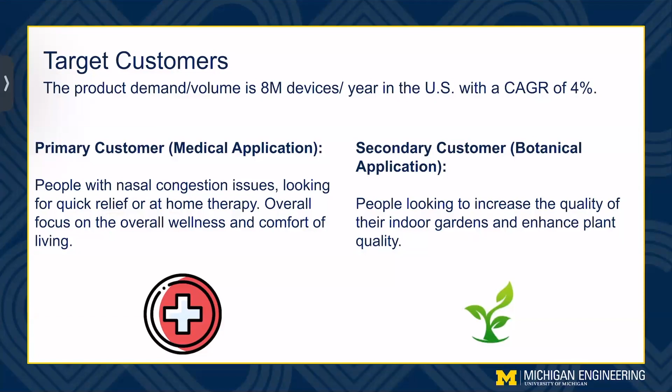We have identified two major target applications for our product. The primary application being medical, with an overall focus on wellness and comfort of living. And the second being botanical applications, such as people looking to increase the quality of indoor gardens. Both applications require an efficient humidifier that will best improve the quality of the air.

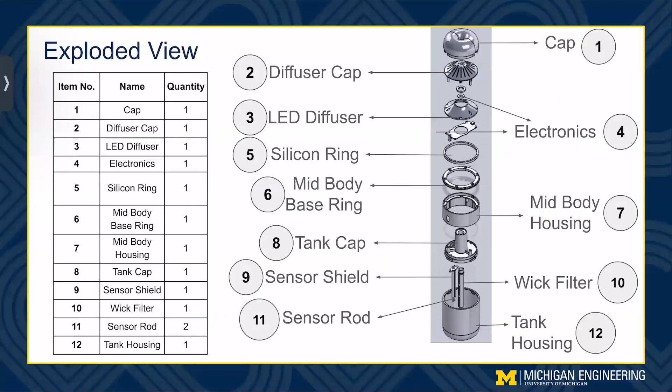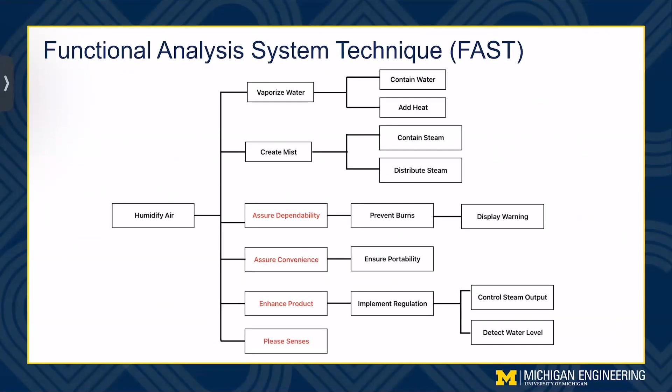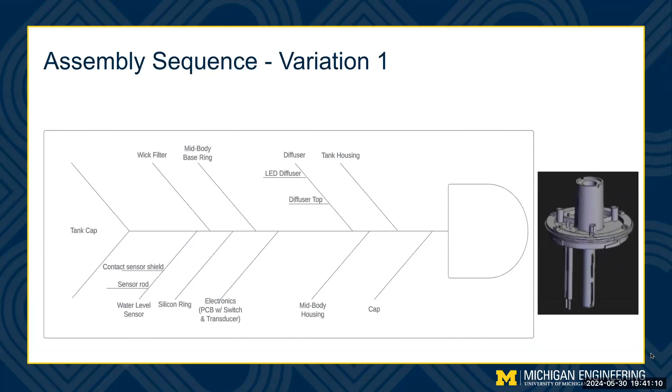We then add the electronic components, followed by the two diffuser components, which include the LED diffuser and the diffuser top. This is then followed by the three housing components, which is the mid-body housing, the tank housing, and finally the cap.

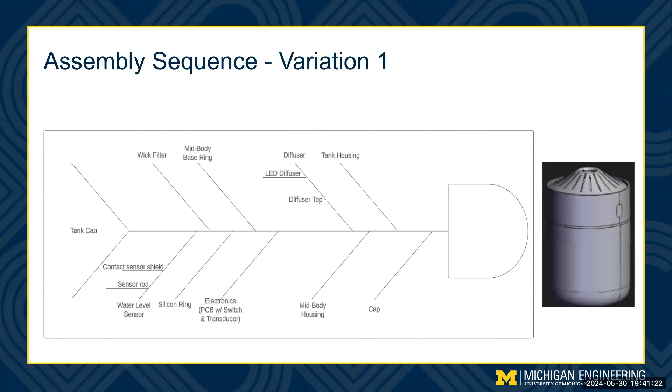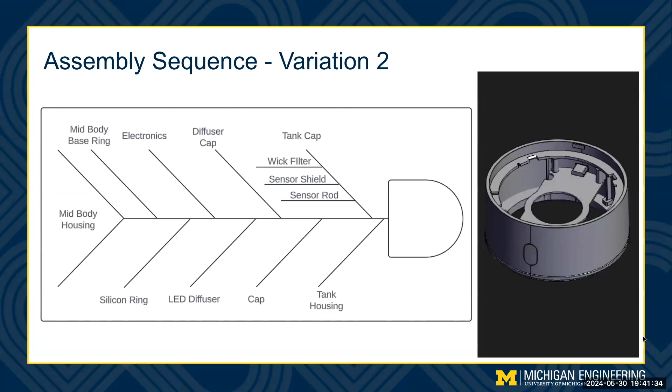For the second variation, we start with the mid-body housing, which is then followed by the mid-body base ring and the silicone ring. We then add the electronic components, followed by the LED diffuser and the diffuser cap. This is then followed by the top cap, to which we add a subassembly of the tank cap, followed by the water level sensor components, which include the wick filter, sensor shield, and the sensor rod. And finally, we complete this with the tank housing.

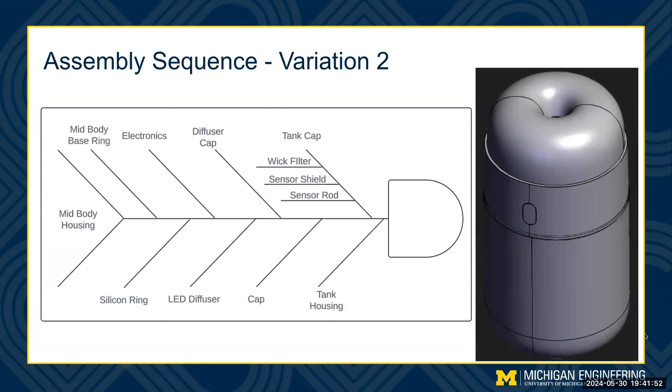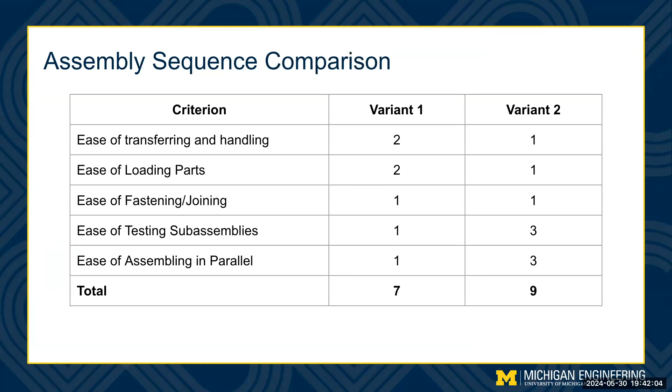When comparing these two assembly sequences, we see that variant 2 seems to be the more likely sequence to go with due to the ease of testing subassemblies and the ease of assembling in parallel due to the addition of the tank cap assembly with the water level sensor components.

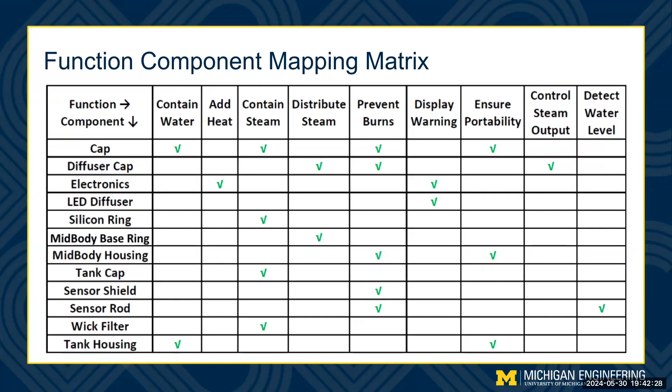We then created a function component mapping matrix, which matches the components of the product along with the functions from the FAST diagram. In this, we see that prevent burns seems to be the most common, as it contains close to 5 components from the product. This could be a potential for inefficiency and could see a possible redesign.

This is our bill of materials along with the cost estimation. We use custompartnet.com to estimate the cost of material, processing, and tooling. We assume that the assembly was done manually and used an hourly rate of $20 per hour for an assembly line worker. Most of the manufacturing process is injection molding, but we can also see processes such as CNC machining and die casting. We also did purchase some of the components. The total cost ended up being $45.53.

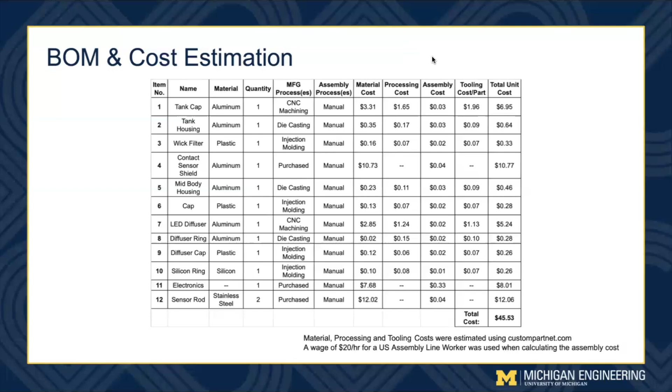We classified the components of our product by importance of functionality and cost. As can be seen, no component was low in cost and low in functionality, or high in cost and low in functionality. Following this analysis, we found that we should redesign the sensor rod, LED diffuser, contact sensor shield, and the tank cap, as well as the electronics. We are excluding the electronics, sensor rod, and contact sensor shield, as these parts would be pre-purchased.

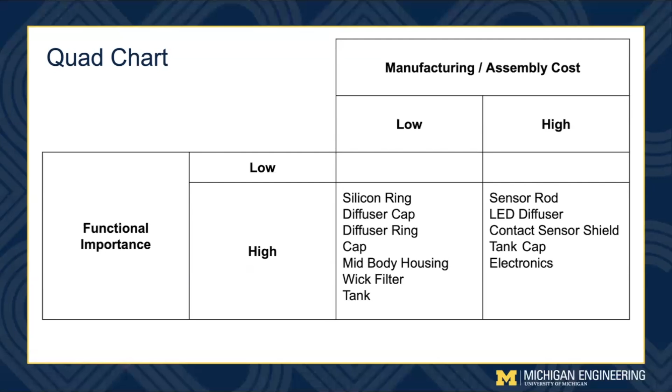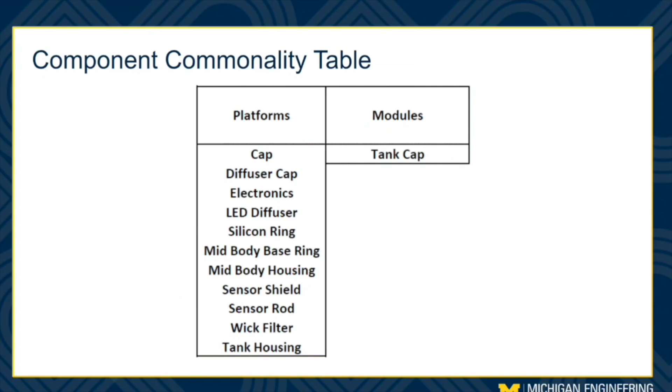These are the two variations of the tank cap we came up with. The only major difference between the two of them is the size of the hole on the top. The relatively smaller hole is more suited towards medical customers, while the larger hole is more appropriate for gardening uses.

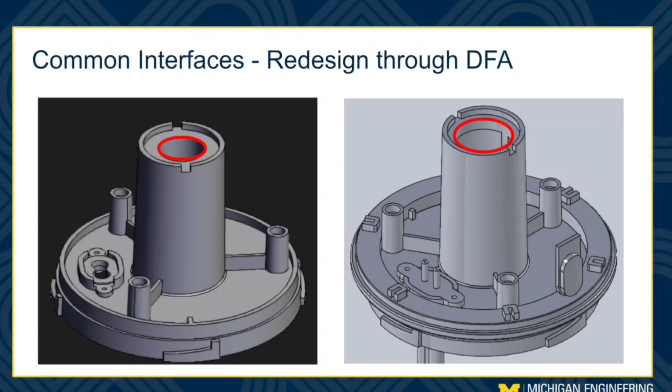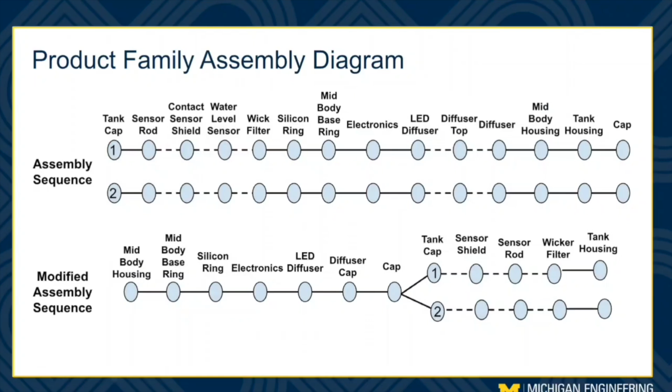Now, in our original product family assembly sequence, it starts with a tank cap which leads to two parallel lines, and this is not at all ideal for a product family assembly sequence. That's why we modified the sequence to have the tank cap come much later and started with the mid-body housing. This allowed this modified product family assembly sequence to have much more of the mushroom shape, which is much more preferred and much more ideal for a product family assembly.